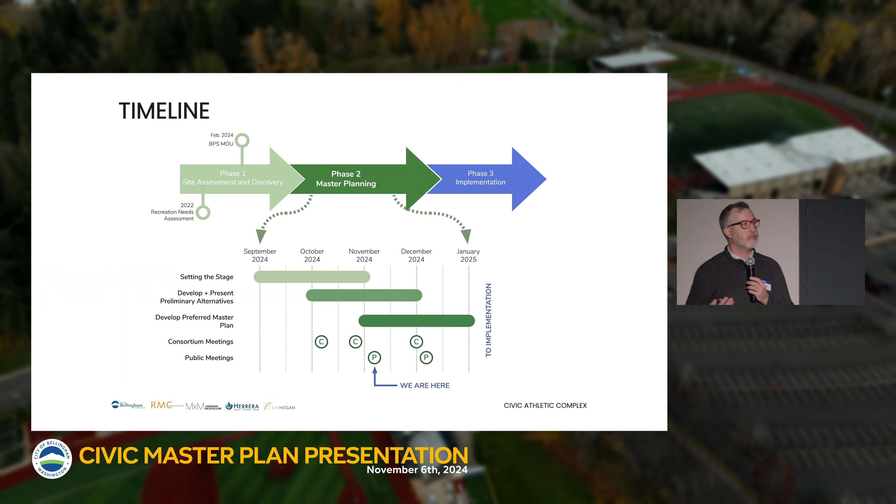So we've been working on this project for a little over two years now, starting with just trying to understand what's out there, what is all the information we've learned from the last couple of years. Now we're into phase 2, and we're really exploring what the potential futures of this site might be. That's been a several month-long process involving a lot of different conversations with different constituencies to make sure we understand what your needs are and what your desires are for what this place might look like in the future. Then we'll move into the implementation phase.

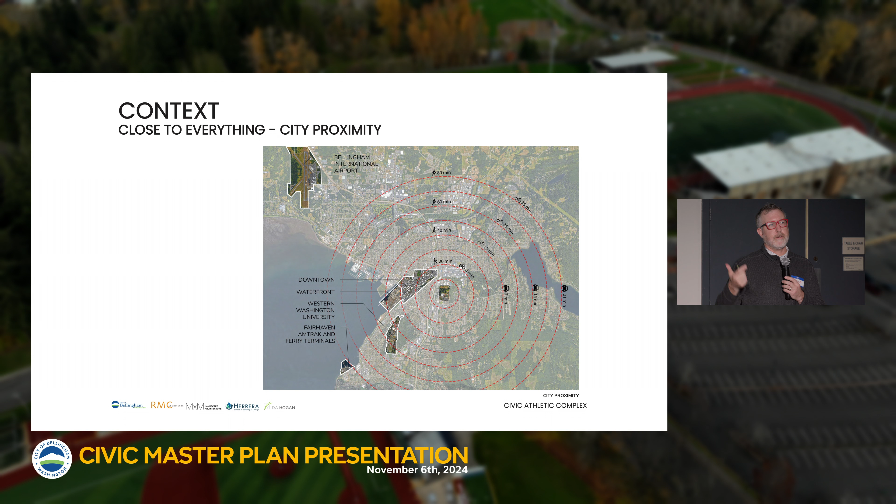So a little bit about the site. You all probably know this because it's part of your everyday life, but this place is amazing because it's close to everything. It's close with walking, close with biking, close with driving, to so many amazing amenities, whether it's natural resources, these amazing forests that braid through the community, Lake Whatcom, Bellingham Bay, Whatcom Creek, it's all within close distance. And as a regional amenity, it's also close to amazing regional facilities, whether you're talking about the ferry terminal, the Amtrak terminal, the airport, or easy access to I-5. This is a place that is central and easily accessible to so many people in this region.

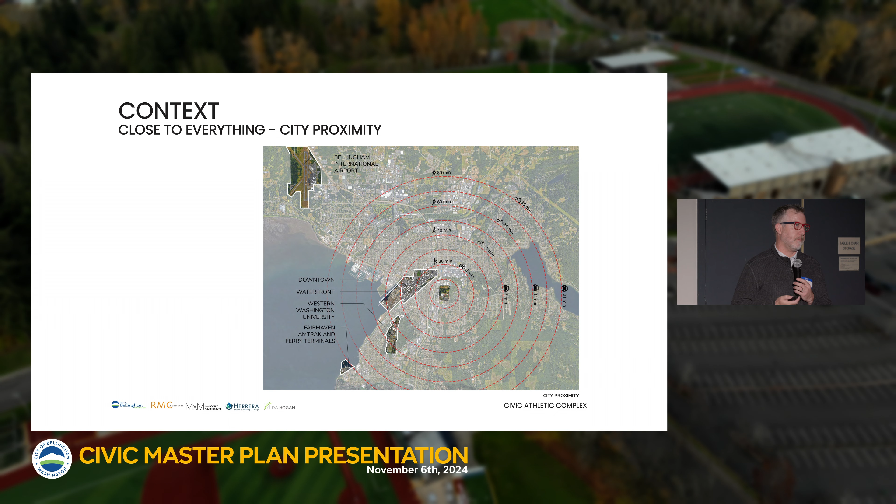The other thing we learned during phase 1 is that this is a place that is incredibly well used and well loved. In fact, it's the most visited park in the system with over 72,000 visitors per month, which is almost twice Lake Padden and Boulevard Park combined. Despite that, or maybe even because of that popularity, it also means it's not meeting the community's needs in various ways, various vectors. We're really excited to have this conversation about how we can better meet the community's needs.

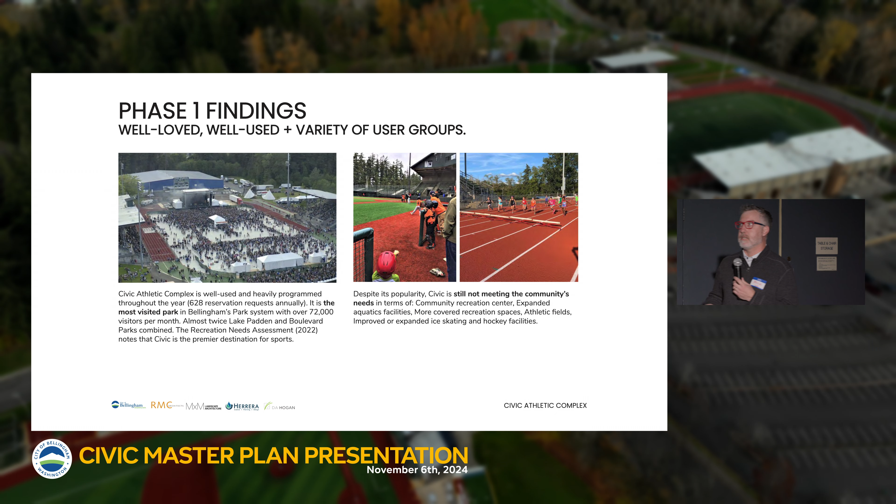As we dove into what's going on at the site now, we also learned a lot about the natural conditions. This is a site dominated at the south end by a lot of recreational facilities and the parking lot, but the north end actually has quite a bit of ecological performance in it, with a series of streams, some really big mature trees and tree groves, as well as some wetlands, which you can see on the map here. We invite those of you in the room to go explore some of these maps. We have a whole series of findings from that first phase of work.

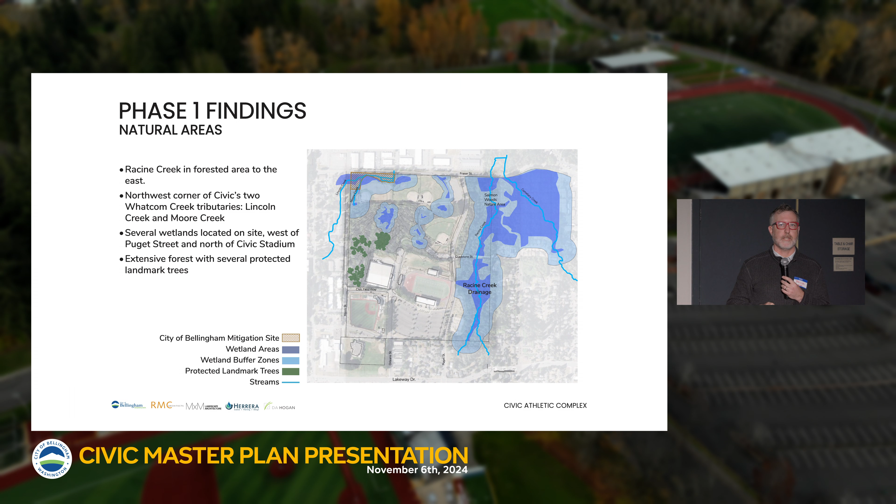In summary of this phase of work, the top line is that every facility, including the parking lots, is incredibly well used and occasionally maximizes its capacity. We've heard people say a place is never used, and then immediately someone else across the room says, no, I use that space all the time. That is my home at Civic. We use it for soccer, baseball, a ski swap, whatever it is. Everyone feels a piece of ownership of something at Civic.

We also know that the funding of some past improvements limits what we can change on certain parcels of land. The ones I'm specifically thinking of are Geri Field 4, Civic Stadium, and Joe Martin Field. The way those have been funded would be quite difficult to unravel.

Various indoor and outdoor facilities are older and require some level of rehabilitative maintenance to continue functioning. The athletic facilities are generally very well used with growing constituencies. There's an opportunity to define and achieve long-standing community goals here, and also to improve the experience and positioning of Civic, both in Bellingham and the region.

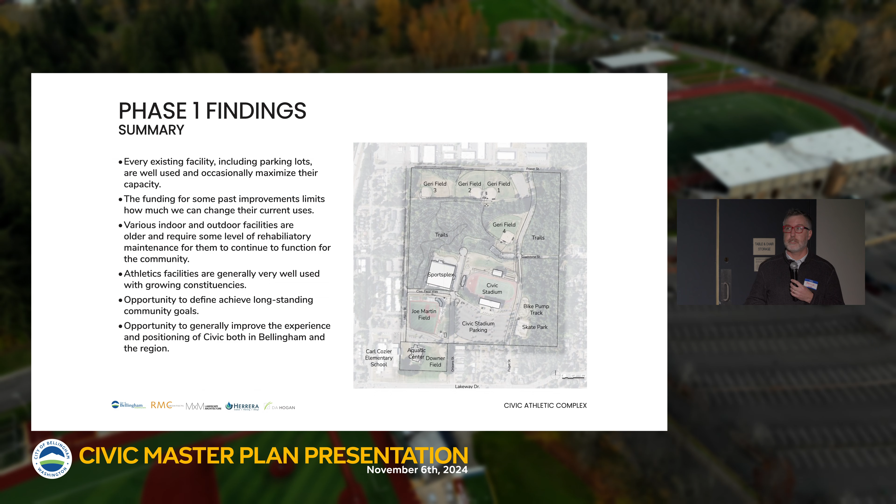I mentioned earlier that Bellingham School District is interested in having this conversation about the Carl Cozier site. One of the things that provokes for us, in thinking about how this facility might land in Civic or on a piece of Civic's property, is what those parameters are for the school itself.

Traditionally the school district is looking for about 5 acres of land, though they've used about 8 acres traditionally. It's a building for about 450 students, about 70,000 square feet, with both outdoor play and garden area. It has to have a fenced perimeter for security, to keep kids safe. There's also circulation for both bus and non-bus traffic, and the school district does a great job of integrating sustainable design elements.

This would be a swing school, meaning that once a new school gets built, this school would be used for about 2 years while Bellingham School District builds another school, and then the Carl Cozier site would potentially be turned over.

There are mutual benefits here. We really see this as an opportunity for a win-win for the entire community. Civic offers co-benefits to Bellingham Public School families by giving them access to these broader recreational amenities the site offers. At the same time, the new school on Civic's campus can offer the community additional play spaces, indoor gymnasium spaces, community spaces, that sort of thing. We really see this as a big driver, an inflection point in Civic's history.

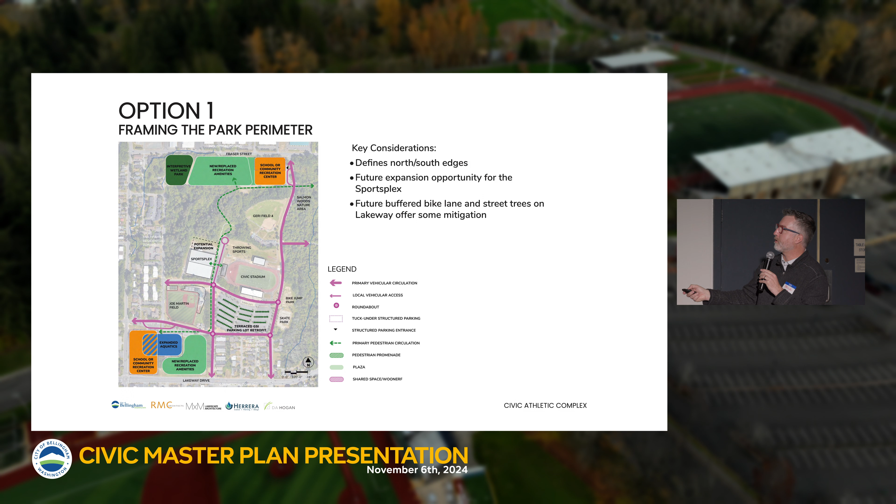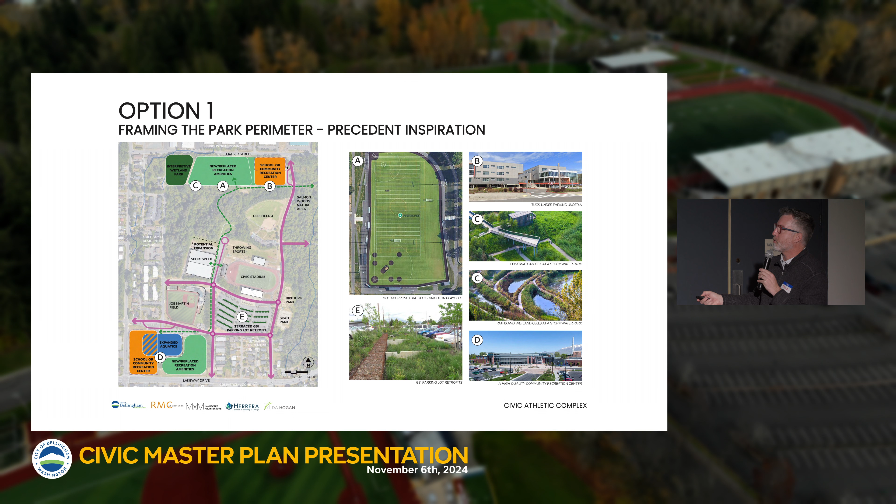And then we've heard from a lot of the indoor recreation users about some of the state-of-the-art facilities that are out there. This is an example from Provo, Utah, really the premier destination for recreational spaces. And this is what some of those green stormwater infrastructure improvements might look like in the parking lot itself.

The second option really begins to think about, okay, well, what if the school or community center really began to land in the middle of the park site? And what would that mean for us?

One of the things we're concerned about with this particular option is that we don't cut off the site between north and south. So how do we sneak pedestrians through this site, moving them back and forth, so that this might actually be a gateway between the north end of the site and the south end of the site?

On the north end of the site, we're contemplating new or upgraded recreation facilities for all of the Geri fields there. Again, the center school or community recreation space with some adjacent structured parking if we need to go that direction for capacity. And then the Sportsplex is anchored here with a Woonerf that then turns into a pedestrian promenade.

All along the edge of Joe Martin Field, allowing people to still drop off and pick up - we heard about the heavy hockey bags for sure - and allow you to drop off and find a parking spot so that you're not having to haul that across the whole site.

Carving away a little bit of space then, perhaps from the existing parking lot, so that we can have some of those new recreation amenities that perhaps better serve the neighborhood.

And then down along Lakeway, having a single bar, a single mass of a building that is either that school or community recreation center, and behind it, that expanded aquatics center and structured parking here on the corner of Lincoln.

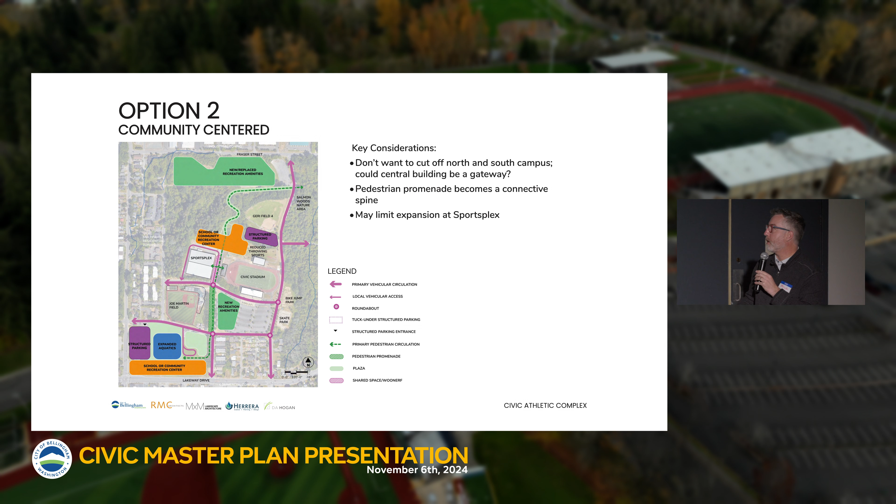I think the big moves here, one is that connective path, the connected pedestrian corridor, including this closed pedestrian promenade portion here, really emphasizing that walkability on the site.

Some of these things might look like this - where there's this great plaza opportunity here, welcoming people into either aquatics or that school or recreation center, or maybe it's more of a town square type of facility.

Again, this is another one of those great recreation opportunities that some of the constituents pointed us towards. This is at Eastern Washington University, a really great facility.

And then in this space here, this new recreation amenities might look like a community playground, or it might look like picnic shelters, and that would be anchored along this pedestrian promenade.

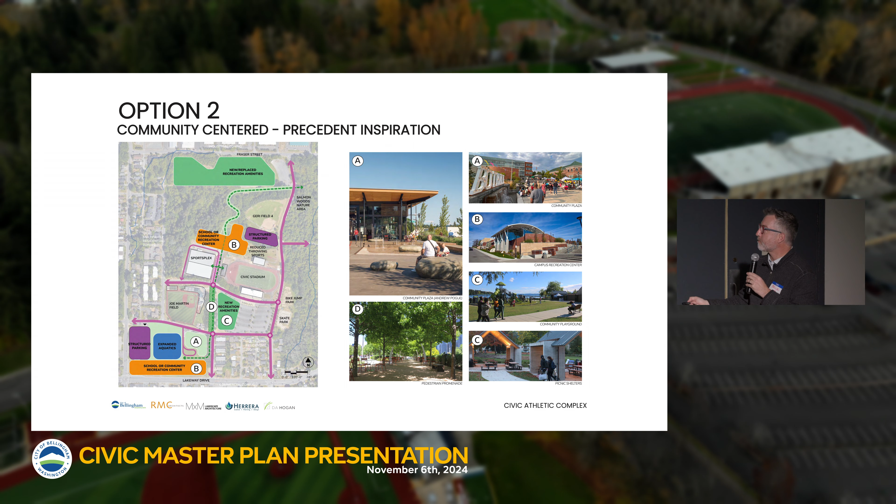The third option, you can see we're like keeping on compressing and compressing. So the third option compresses it down so that most of the activity is happening south of Civic Stadium.

And here, this is kind of an exciting one in that it thinks about changing the grades a little bit, changing the topography, and anchoring a school or community recreation center here, right across from the Civic Stadium, as well as here along Lakeway.

And these get then connected by a single open space move that really anchors aquatics, anchors the school or community center in these two locations - Civic Stadium, Joe Martin Field, and the Sportsplex. So it becomes the 'there', if you will, of the site.

And then those get connected through this Woonerf or shared space that turns the corner towards the Sportsplex, with a little bit of structured parking here in the corner along with improvements to Geri Field up there.

One of the things we've heard is a real concern in all options that put any sort of development along Lakeway, is that it feels like a place that feels a little inhospitable.

We just wanted to flag that there's a future buffered bike lane planned there, along with new street trees along that street, so it'll get a little bit better in the future.

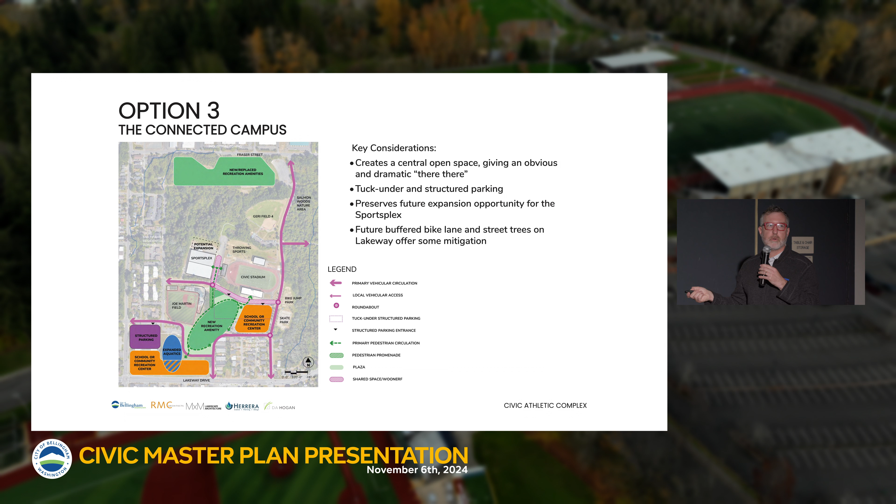One of the things this design contemplates, which you'll see in a second, is how it preserves parking. About half of the existing parking field actually tucks under this building, on a one-story parking structure, with the park up above it.

This is what we're talking about, where there's a parking garage underneath with an open space above it—in this case an athletic field. But that need not be an athletic field; it could be more of a social space for community events over the summer, that sort of stuff.

This all gets connected through a shared woonerf space along this edge. Tuck-under community uses could go along this edge with meeting spaces and community spaces with parking behind, a pedestrian promenade with a colonnade of trees, and the way you could integrate art into some of the roundabouts.

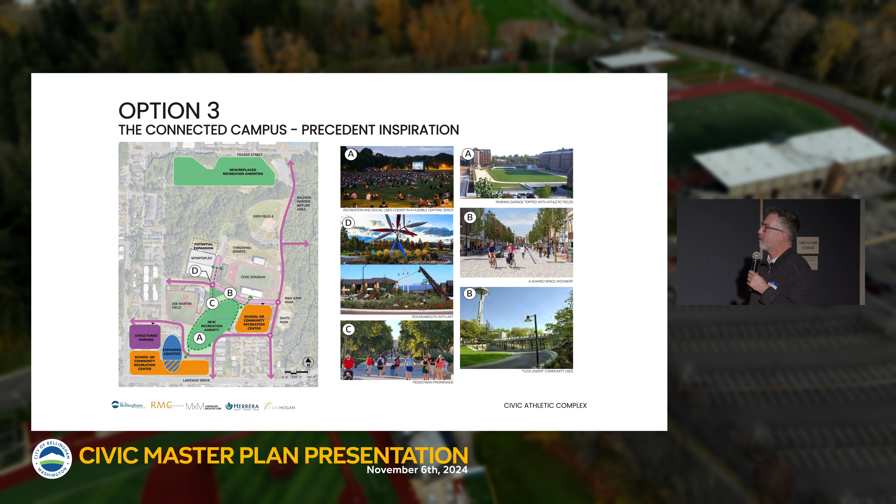For our last option, we're compressing down even further. In some ways, if you were really constrained in your site planning, you might look at this first: could you anchor the community recreation center at the corner of Lakeway and Lincoln, and then where the Downer Fields are now, make that the spot for a school or community recreation center. This really tightens up the footprint and puts a lot of uses together.

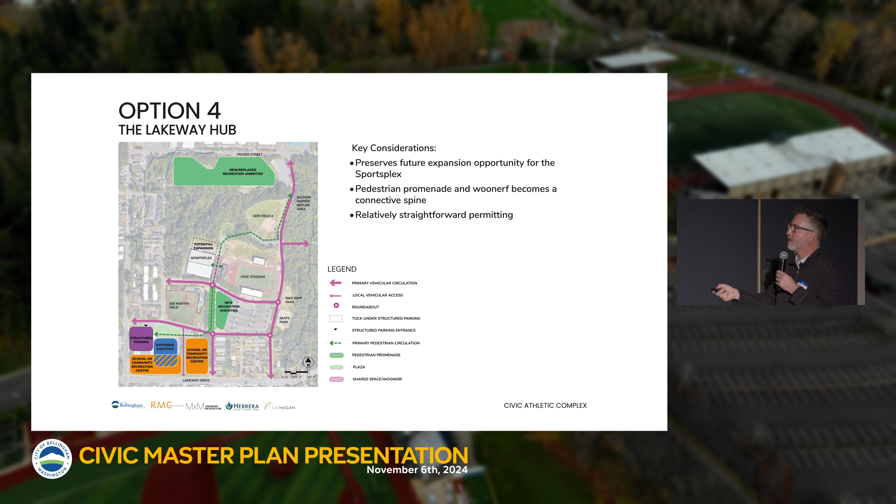It preserves that future expansion opportunity for the Sportsplex, and the pedestrian promenade and woonerf along there becomes that connective spine. One benefit here is it's a relatively straightforward permitting pathway. It also has the improvements to Geri, the pedestrian promenade connecting them, and a smaller carve-out of recreational amenities along with a plaza.

This might look like solar picnic shelters, a community playground, or even a spray park, or pickleball as new amenities along here. This is an example of an elementary school on the left and a community recreation center on the right, existing in close proximity and serving one another's constituencies—a little bit of what that shared woonerf space might look like.

So that is a fire hose of information for you. What I want to invite you to do is come up here after I'm done talking, ask me questions, ask the other team members questions.

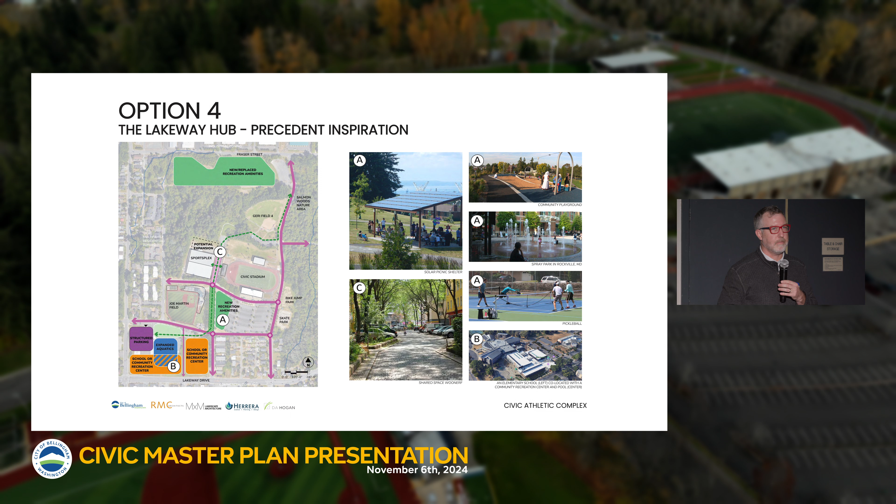What we're trying to get feedback on is how well these options align with the guidance the Bellingham community gave the Parks Department through their PROS plan in 2020, recently revised in 2023, on these 6 values: preservation, connection, play, equity, resiliency, and inclusivity. We thought it was important to add a 7th value: the value an option provides to the community—meaning costs, permitting, impacts to the community as a whole, and potentially promoting tourism.

So we invite you to put dots on these boards—I see some out there already. That's one way we're going to know how these are resonating. The other way is through a survey; you'll see these signs up throughout the room tonight. There's an online survey you can take to give us your feedback, more open-ended questions, less of a dot exercise, that will help us really gauge how the community is feeling.